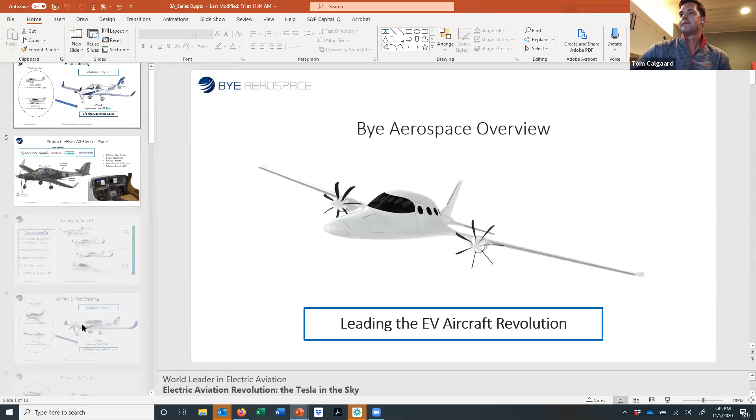Actually, you know what? I do need to bring up one other document. And I apologize for not having this in this document. It's worth showing that we have been flying. Let me just show this real quick. Obviously, it's going to be choppy from your end. You can go to YouTube and look up Bye Aerospace, and there's all sorts of videos.

That is the conforming airplane design. In fact, this is actually an older rendering, so this is not exactly what it looks like today. I would flash up what it does look like today, but I know you're recording, and again, for IP purposes, I can't show it to you right now because it's a stripped down view of the inner workings of the airplane. And by the way, for those that aren't familiar with aviation, your IP is your type certificate.

So we don't need patents. Our IP is basically getting a certificate from the FAA saying we're conforming to a design, and that design has been certified by the FAA. So we can't just go build a Cessna 172 and sell it because we don't hold the type certificate. So it's IP that basically lasts forever. And there's a lot of trade secrets behind it.

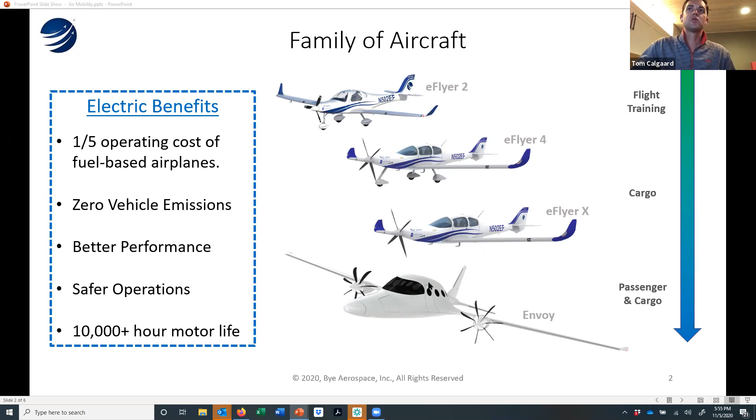But when we go back to actually looking at this business and cargo, when you think about Amazon, you think about the fulfillment centers. If you're in a location that doesn't have a fulfillment center, how do you do Amazon Prime? Well, there's feeder fleets for UPS, for DHL, for Amazon, for FedEx. Who am I missing? There's contracts for cargo, and usually it's less than 400 miles. It's 250 nautical miles typically is the type of trip.

Well, this platform can do 500 nautical miles, so 900 kilometers or whatever the math is for miles. I do most of my conversions to metric, so I apologize. Statutory miles versus nautical miles. 500 basically gets us everything we need inside of the typical mission profile. We have a very similar volumetric room for packages in comparison to the Caravan. We fly faster than both of these airplanes.

We're about 320 knots, which at 35,000 feet, you're cruising pretty fast for a propeller. And let's not even talk about what a turboprop or turbofan looks like for electric. That's a whole other conversation because you don't have the same fuel. Anyway, I know I'm running low on time here, so I'll be quick.

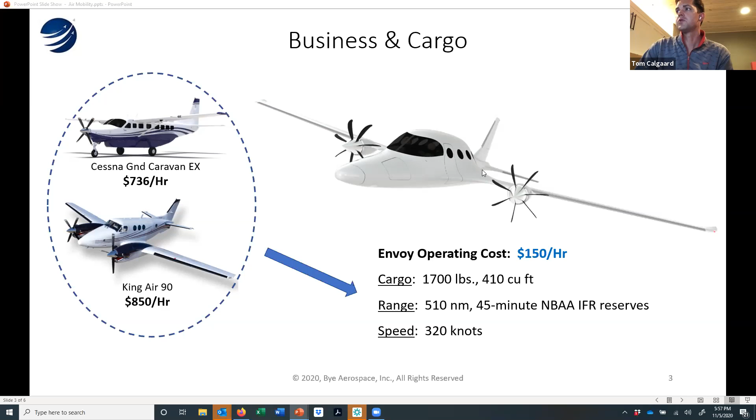The big component here, look at the operating cost, $850 an hour versus 150. It's all about the fuel. It's all about you've got one moving part versus in an internal combustion engine, you've got 500 plus moving parts. So the wear and tear, the vibration, just like a ground vehicle, it's just a lot more efficient, and the operating cost just goes way down. Environmental benefits we talked about.

It's 30 decibels quieter. The eFlyer 2 is, in comparison to a 172 at 500 feet over. So you're not going to hear it. On a day where there's a little bit of wind and ambient noise around you, typical daily life in a city, you're going to see the airplane, you're not going to hear it. It's 1,000 times quieter.

The Envoy actually eliminates 1 metric ton of carbon emissions an hour in comparison to competing aircraft. So that's a pretty big deal, and we're really excited about that.

The infrastructure, so charging, is going to be very simplistic around pilot training and how we then scale that from airport to airport. We have a plan for that. The motor and the battery technology is already there. At the pack level, we're about 220 watt-hours per kilogram. To get to the Envoy, we need 500 watt-hours per kilogram. Really, we need 400 to close the mission profile.

The cells we're looking at right now are already 500 watt-hours per kilogram. It's the cycle life that's just not there yet. So we have a pathway to get to the energy storage, but we're agnostic to the energy storage. We don't care if it's lithium ion, lithium sulfur, lithium metal, or fuel cells. Fuel cells have a volumetric constraint, and you have a lot of other things you have to deal with at altitude around thermal control.

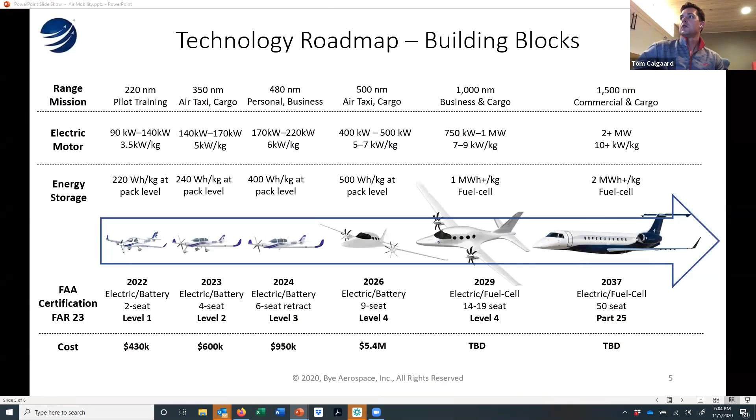Yeah, so we want to scale production well beyond 1,000 airplanes a year. If you're not talking, could you go on mute? There's a lot of background noise from somebody. The eFlyer 2 and the 4 have a very similar supply chain, very similar manufacturing process. So between the two of them, we expect that we'll be building well over 1,200 airplanes a year, which will be a big change from the current production at other OEMs.

Back in the 60s, 70s, and early 80s, there were about 17 single engine airplane manufacturers, and they were building anywhere between 12 and 16,000 airplanes a year. Last year, in our class for the eFlyer 2 and the 4, there were probably about 1,000 built globally. So it is a big change.

Cirrus built 715 SR-22s and 20s, which are similar to the eFlyer 4 in size, back in 2007. And that's kind of the scale. That's kind of the most that has been built from a single composite plant in a long time. So we understand what we have to do. And anyway, that's kind of the numbers.

Okay. And Ken Jones, you said you have a question? Yes. Is Carl Lawrence any part of your team? Carl Lawrence. I don't know that name. I apologize. But it's great you've assembled a great set of experienced folks to get your company off the ground. Absolutely, yeah. We had Charlie Johnson, who was our chief operating officer up until last year when he retired, and he was the former president and COO of Cessna. And then we have a whole host of advisors that have done similar things in the past. I don't have the experience, but they do. I'll have scar tissue when it's all said and done, but I want to try to avoid some of the mistakes at least.

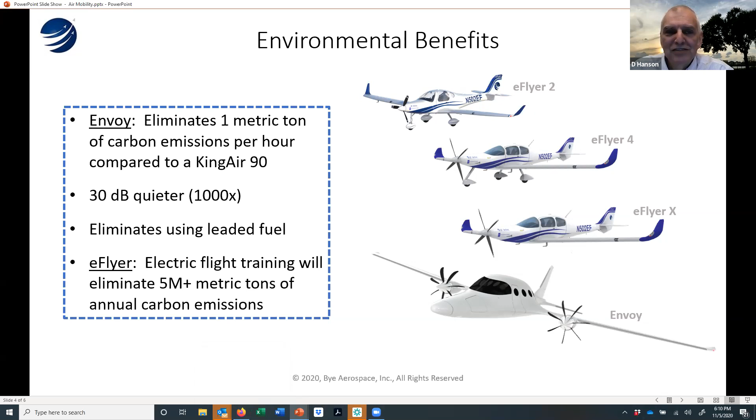All right, very good. Well, I thank you very much, Tom. I think that this has been very educational for all of our members. We've got folks from all different backgrounds, folks from Canada tied in, and I could easily see people flying your planes all around North America. Yeah, thank you very much. We've got 110 deposits in Canada. So happy to answer questions if you want to feed them through Dave later on.

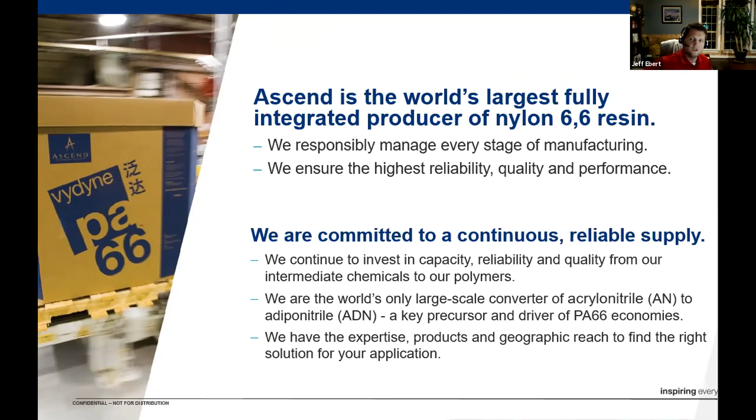All right, so Ascend is actually the largest fully integrated nylon 6,6 provider in the world. You may have heard of our Vydyne products or some of our newer products. They're actually back integrated into all their raw materials, which makes it very easy for us. And they're also the only large-scale converter of acrylonitrile to adiponitrile. So that's important for us because the conversion of acrylonitrile is actually how we make our Trinohex Ultra. So we also have a very nice global presence.

Dave, the slides are moving forward, correct? Because I can't see you guys anymore. Yes. Okay, you're awesome. Working fine.

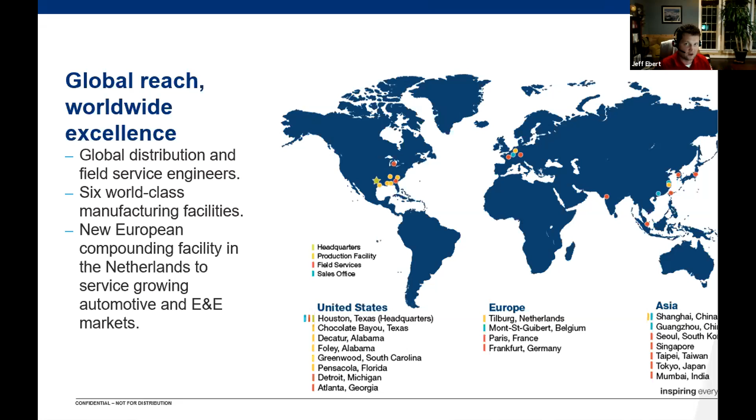All right. So we have a very large global presence. We're fully integrated across the globe for our nylon intermediates and specialty chemicals. We've recently had some acquisitions in China and in Europe, and we recently opened a facility in Detroit that is dedicated to electric vehicles and the automotive industry. So a little bit more on that.

This slide here is actually a summary of all the areas where Ascend is engaged in improving electric vehicles. There's way too much detail and way too many places that we could talk. We could talk for an hour just on this slide. So I'm not going to get into it right now, but I will point out in the bottom left corner, you'll see the word Acteev.

Acteev is a product we recently launched that has a lot of antimicrobial behavior. And it has been woven into masks and into filters. The filters will go into the vehicles, and the masks work really well at preventing any kind of antimicrobial issues. And Ascend recently donated 5,000 of these masks to the University of Houston's football team so that they could proceed with all their football activities this year in a safe manner.

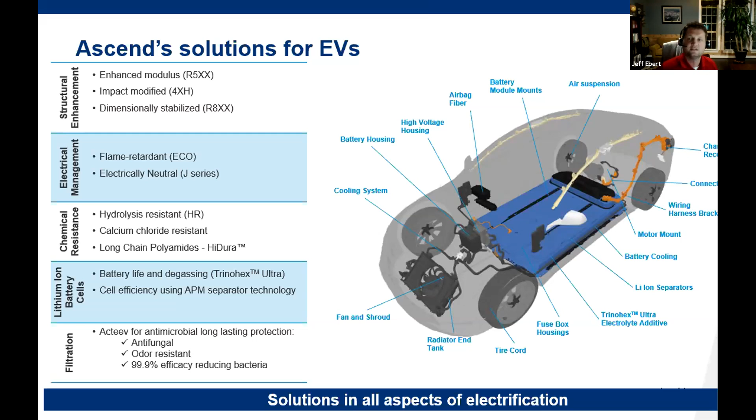So I'm going to stick around at the end. For anybody who wants to, we can come back to this slide and we can talk as much as I know about a lot of these areas for as long as anybody wants to. But I'm going to try to move through these slides so that I can show you guys some interesting things. So let me go ahead and try to introduce Trinohex Ultra and then explain what makes the development quite difficult.

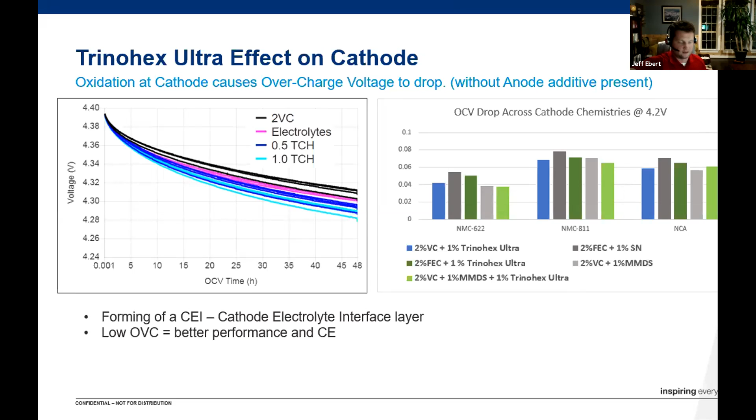Coulombic efficiency is very simply your discharge capacity over your charge capacity. And if you get about an 87% FCCE, then you're looking at about 278 of those milliamp hours. You had 320, and right after formation, you're down to 278. So first cycle coulombic efficiency, you want to stay very high. OCV drop, you want low. First cycle coulombic efficiency you want high, okay?

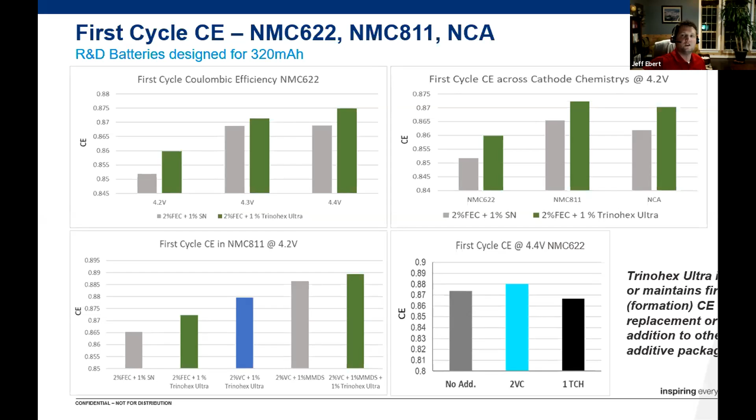So I'm going to move forward into something else that's very important. It's called gas reduction. Every battery in formation generates gas, and every battery has to be opened up, the gas removed, and sealed back up before it goes out the door. Okay, so gas reduction is a very important thing. There's a lot of companies that have a history of issues with managing gas, and when the gas occurs, you can actually get an expansion of the battery. One of the more susceptible batteries to gas is the pouch cell. And the pouch cell is used quite a bit in a lot of different applications. So gas reduction is very important.

So we decided to do a strategic set of tests in LCO, lithium cobalt oxide, at around 4.5 volts. And we benchmarked this against propane sultone. And the interesting thing here is that propane sultone had to be dosed at 4x the level of Trinohex Ultra to keep it in the same range. And Trinohex Ultra still outperformed propane sultone in all areas of gas reduction, and also outperformed propane sultone in the capacity retention that it had in each of the different additive packages tested.

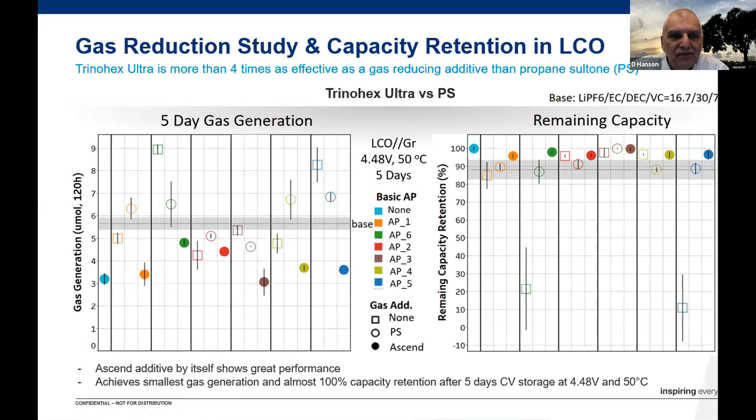So in these graphs, I don't know if the pointer actually moves. In these graphs, you can see all these data points where Trinohex Ultra outperformed, and that was a phenomenal across-the-board set of tests. So this is very good, but this is LCO. So we wanted to go ahead and expand the chemistry.

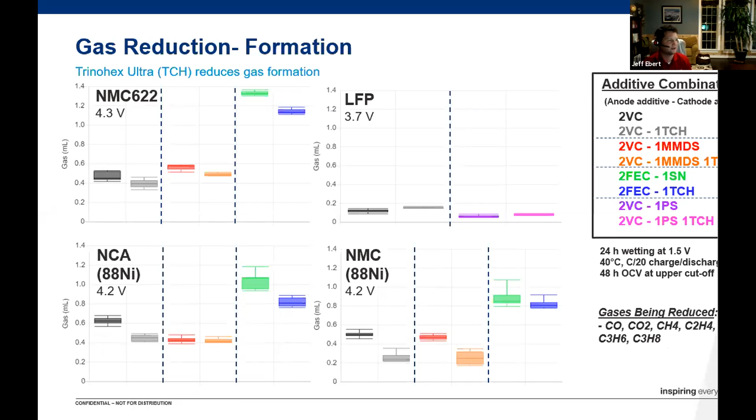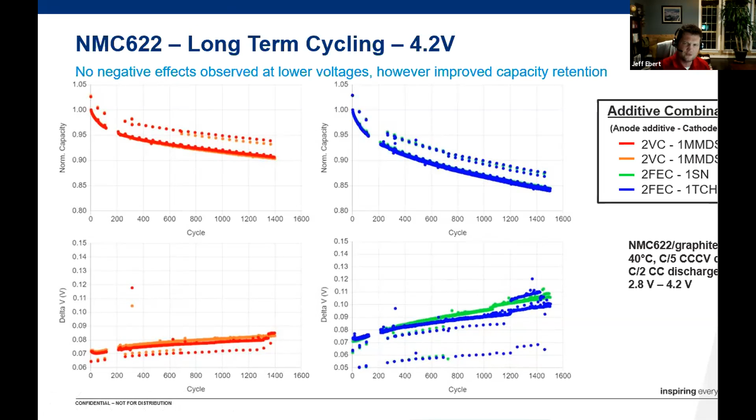And the reason I'm okay saying that is because we're going to go ahead and up the voltage on the 622. So here you see NMC 622 at 4.3 volts. You start to see some of the behavior shift. Some of the curves are a little bit different. You're starting to see some separation. Again, here you want to see the lines staying high and flat, and down here you want to see them staying low and flat, right?

So again, these are out here at 500 cycles. These tests started later than our NMC 622 4.2 volt cells, okay? And so I don't really want to make any calls because this could change drastically when this number of cycles have doubled. But still, what you're not seeing is a drastic fall off in battery performance. And that's really what we're looking for.

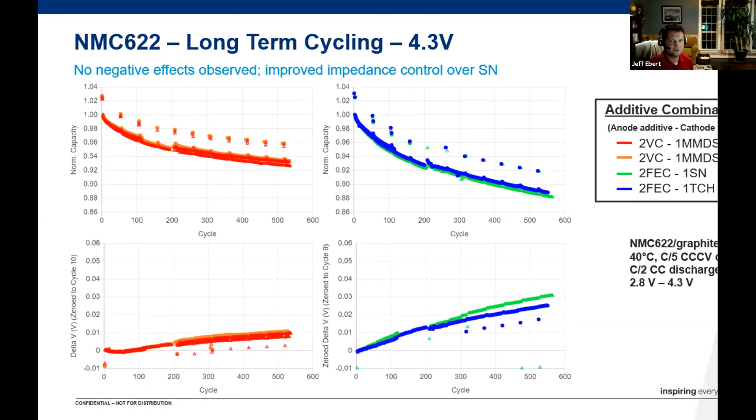And so, does anybody else see this bar in the middle? Is there a way I can move this? There it goes. Okay, excellent.

So the real world study is very important in that the R&D cells are great to test, but they have a slightly different loading. They're all pouch cells. And if you really want to turn around and characterize kilowatts to kilograms, you really need to standardize it in a known battery. So we chose 18650s, and we chose 18650s with an NMC 622 cathode at 4.2 volts, which is a well-known type of 18650. And so here we are.

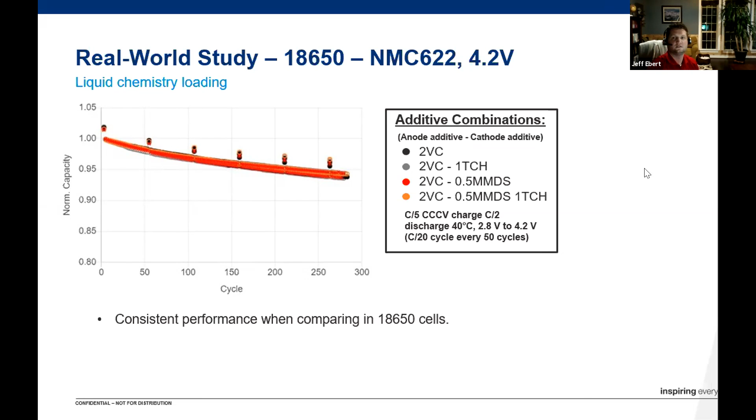So we have now switched from NMC 622 to 811. And the reason I like this slide is because we decided to go ahead and leave a bad set of cells on this graph to show you what it would look like if the chemistry in the battery just did not work. And I'm really happy that it's vinylene carbonate and MMDS, because MMDS works great in the NMC 622, but it does not work great at the even higher nickel concentration.

And so this is the perfect depiction of the difficulty of developing chemistries for these batteries. Here you have a molecule that works great in 622, change it slightly to 811, and it does terrible. No matter what we throw at it, I can add Trinohex Ultra to MMDS, it does not react well in 811. So that's this red line here. And then also we benchmarked the 811s with the FEC-SN blend. And as you can see, the vinylene carbonate Trinohex Ultra blend won out here in these tests, hitting about 800 cycles at that 80% capacity.

So this is good. You can also kind of correlate. There's not a whole lot of impedance growth differences between these either, but you can still see that rapid change in impedance growth with that VC MMDS blend. So this is a great slide.

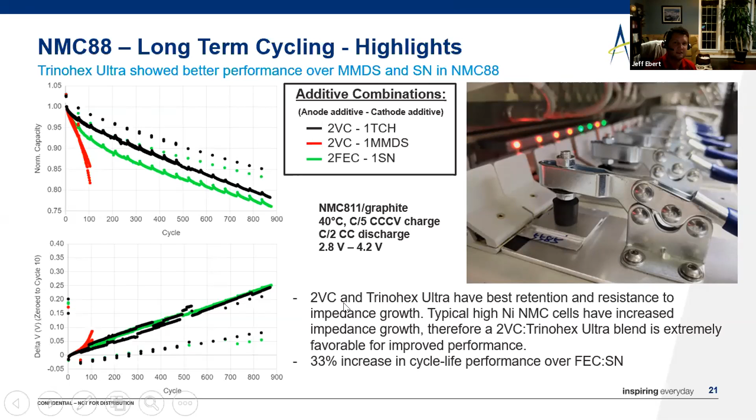So keeping moving forward, we're going to jump over to LFP here. So LFP, long-term cycling, again, very similar. Like I said, this is like a punching bag, and we're going to have to go into the 9th inning before we're going to really see these cells start to move around. You can start to see a split in the two different recipes, which is totally normal. But before we actually see some significant change within those recipe sets, we're going to have to get a few hundred more cycles in. As you can see, propane sultone is being outperformed by TCH in LFP.

That's actually pretty awesome considering the toxicity of propane sultone. So propane sultone is one of those hazardous materials that is being phased out. It's already banned in Europe. So this is great to show that we're a very competitive replacement to propane sultone for both gas reduction and for long-term cycling. The graph on the right, the delta V graph, is showing you the impedance growth issues that propane sultone is also bringing up here in lithium iron phosphate.

Now, earlier I mentioned lithium iron phosphate playing a role in grid energy storage. There's a company in China called BYD. BYD has published a lot of reports around lithium iron phosphate, and you can actually go look those up. You can look up BYD and grid energy storage. And the way this was explained to me is just very simply the battery the size of a house that's strategically positioned within the electrical power grid to balance and protect the grid from failure.

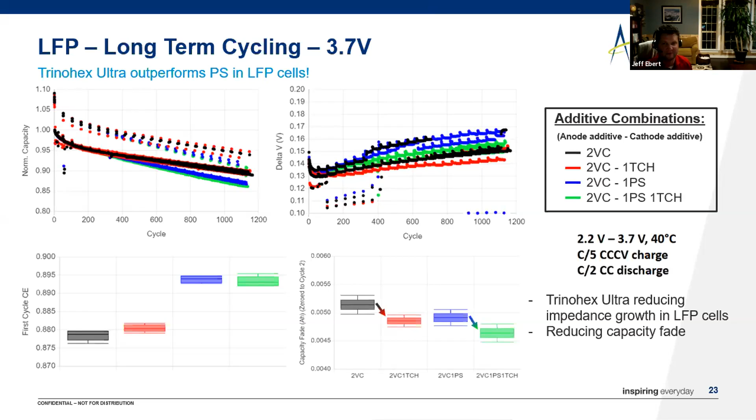So I'm going to move forward a little bit here. We're going to move into high temp storage and cycling. So high temp storage is very important. It just looks at your energy density over time. So the standard tests here in industry are about 500 hours and about 60 degrees Celsius. So again, we benchmarked NMC 622. We went to 4.3 volts, which was standard, and you can see the improvement that Trinohex Ultra makes over vinylene carbonate alone. It is a drastic improvement, and you can also see Trinohex Ultra improve the formula of vinylene carbonate and propane sultone. So that's very good, and that's also very predicted.

Trinohex Ultra is a very high boiling molecule, very high flash point, so it really provides a lot of stability to the battery system in these conditions. What's also really cool to point out is the opposite effect you see in lithium iron phosphate. Because the voltage is so low there in that test, you don't really see a lot of separation. You don't really see a lot of advantage.

All the lines and all the formulas seem to be in the same place, right? So it's another great way to point out that you can't just do one test to show the value that your molecule could create in lithium ion batteries. You have to do multiple tests and kind of look at the whole picture to get the total value.

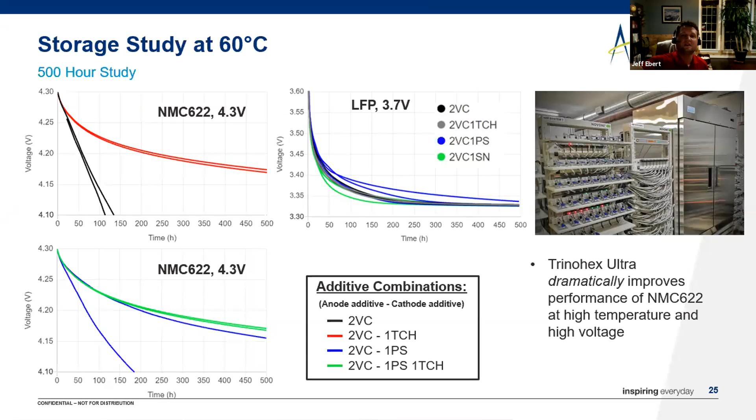The next thing we're going to look at is high temp cycling. And so here you see a very new set of data that we put together. These are only about 100 cycles in, but they're very aggressive conditions. So I expect to get another 300 to 400 cycles into this set of tests and see some very drastic changes in our overall capacity versus our impedance.

You're already starting to see some very interesting things occur with impedance growth, especially with the propane sultone. So I would say another couple hundred cycles here, and you're really going to see some value created with Trinohex Ultra with the stability of the overall system.

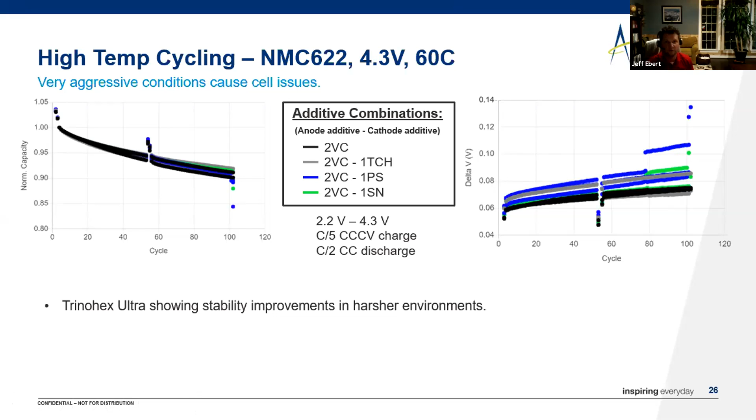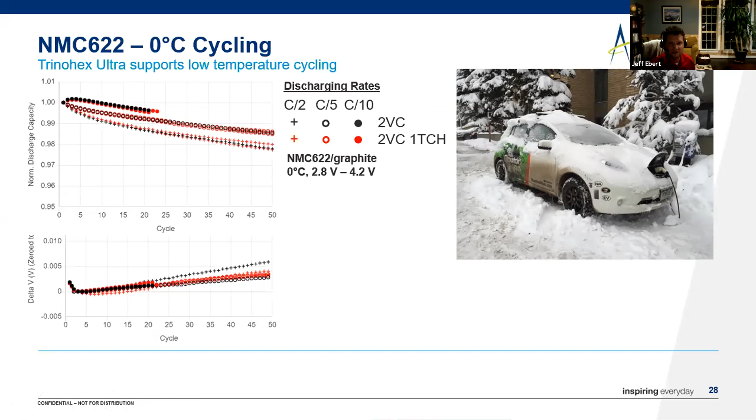This is definitely my favorite slide. So in our travels in 2019, we spent a lot of time in Asia and some time over in China. And before we got there, we spent a bunch of time in Europe, in the United States, being told that the standard test was 80% of the original capacity at 500 cycles. And at the time that we went to China, we were 300 to 400 cycles in, and we were praying that we would hit that 500 cycle mark and that 80% capacity. And we obviously did in many places, but we hadn't gotten there yet. So we were still nervous.

And then we got to China and they said, nope, it's 1500 cycles and 80% of the original capacity. And we looked around at each other thinking that this was a milestone we were just not going to ever be able to achieve. So we came back, we put our heads together, we looked at some of our chemistry, we picked some NMC 622 again at 4.2 volts. We designed some new cells and we said, let's let them run and let's see what happens. And lo and behold, we were shocked.

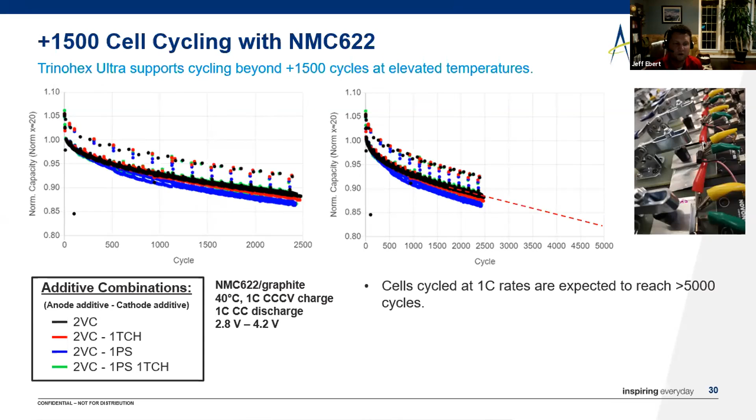And then the last thing I'm going to show you is high rate testing. And high rate testing is very simple. That's your fast charging. Okay. So one thing before I actually go through this slide, Ascend is very keen on safety. We have goal zero campaigns at all of our manufacturing facilities, and we don't just care about safety internally. We care about it externally as well with any of the testing facilities that we use. So we sat down with Novonix to take a look at the safety side of trying to charge and discharge these batteries at about 6C, which really equals 10 minutes.

And we decided that this could not be done safely, or at least we didn't think it could be done safely in the pouch cell format. So we actually switched these over to the 18650 cells. So this is more of a real world test anyway, and we were happy with that.

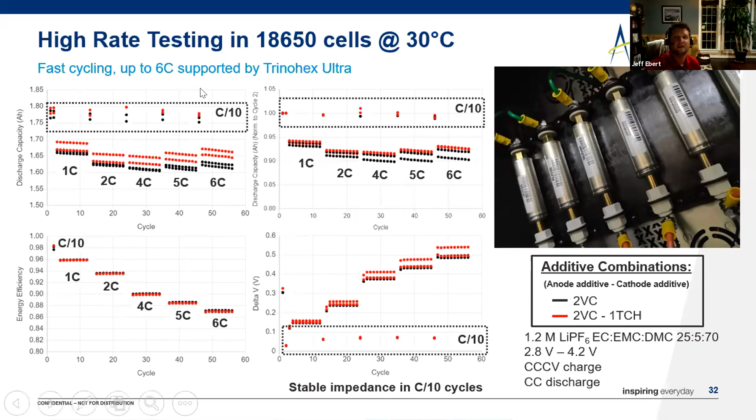All right, very good, Jeff. And yeah, the passion obviously comes through, but I think our world really needs better batteries. Absolutely does. Yeah, seeing Eric's video there, of course, in Canada, you're kind of at the opposite end of Canada from where Novonix is, but it's nice to read about the battery research going on in Nova Scotia. As you probably know, Tesla is working with folks in Canada over in Nova Scotia as well. We actually interviewed Jeff Dahn to get a better understanding of a lot of the baseline research we wanted to do. He was very helpful in helping us determine our initial recipes, and he's a very interesting guy.

Always wore jeans. It was nice. Okay, so he's casual. That's good. Yes, he is. Very good guy.

But yeah, we know that you'd mentioned grid storage. I mean, that's going to be huge going forward. Something that some folks have heard me say before, but I know that you haven't heard. The Houston Energy Group had a speaker, a title lawyer for land, and he said that the biggest number of clients coming in were looking for locations next to electrical substations. They wanted to buy property. And the reason they wanted to do it was because they wanted to locate batteries and tie them to the grid. And that was an economically viable platform. And so, yeah, they knew the better batteries were coming. So it's great that you and Ascend are doing that.